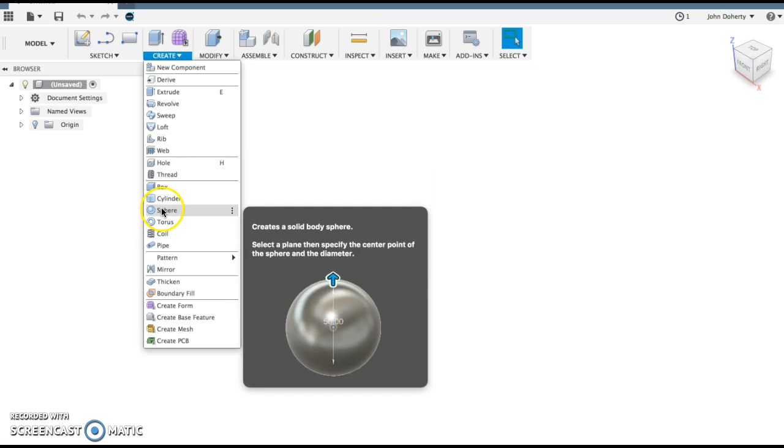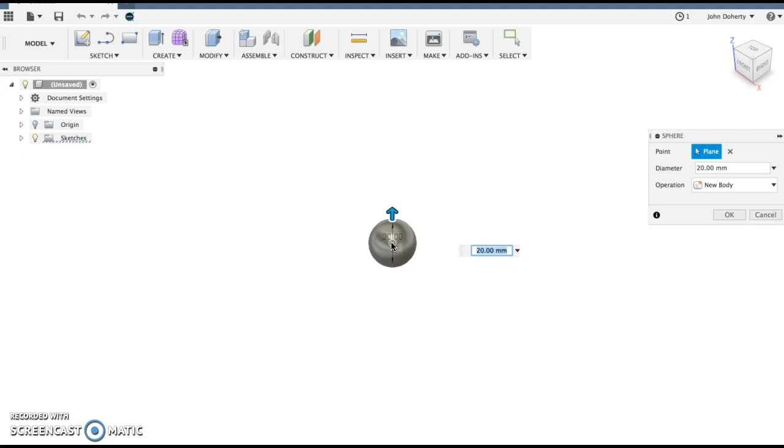The easiest way to design anything like a dome, which is essentially what we're drawing, is to go to Create and select the tool Sphere. We need to select a plane for this, so we're going to go for the base plane or the top plane, then click on the center, and it gives us a sphere straight away. In this case we're going to make that sphere about 15 millimeters, and I'm going to press enter.

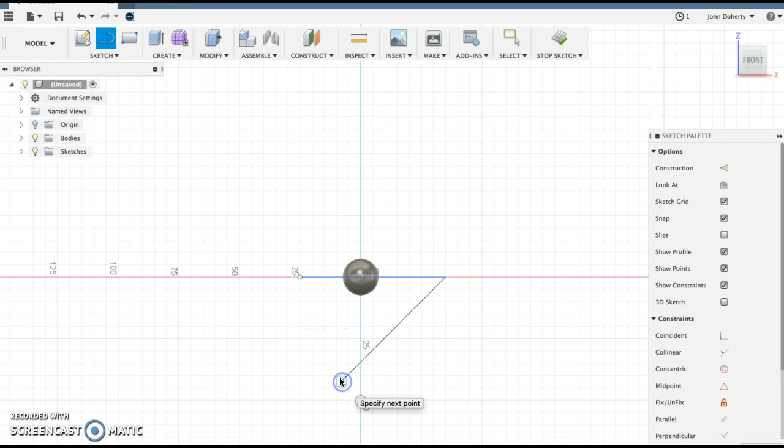Next I'm going to go to the front plane and create a sketch along it. Here I can draw a line across the middle halfway, and draw a simple triangle. The only important line is this center line. The other lines are just so we've created a 2D shape, and you'll see that in more detail if I press the home tool.

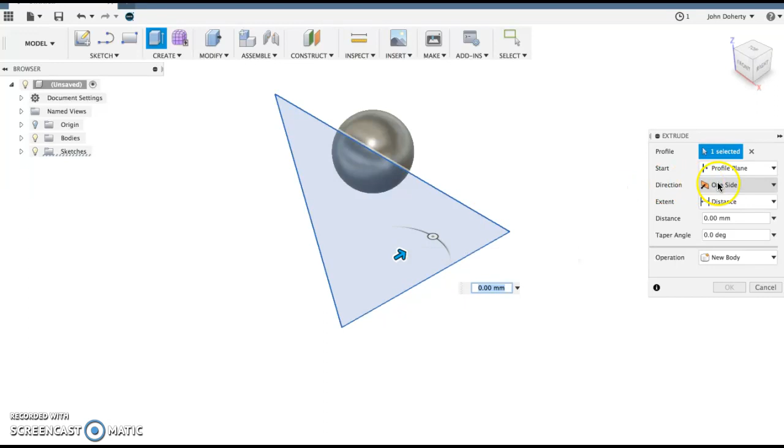I can stop that sketch and press E for extrude. I can go to direction and change this to symmetric. So when I pull my extrude, I'm now in cut mode, cutting through the surface and essentially getting rid of half the material. I've now got a nice little 15 millimeter nose cone once I press OK.

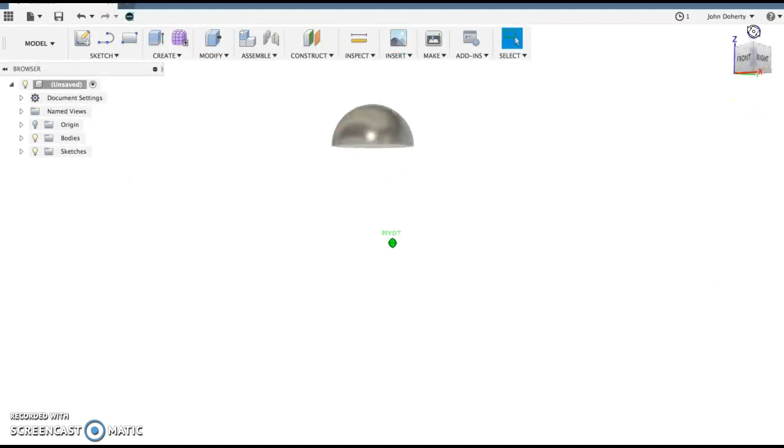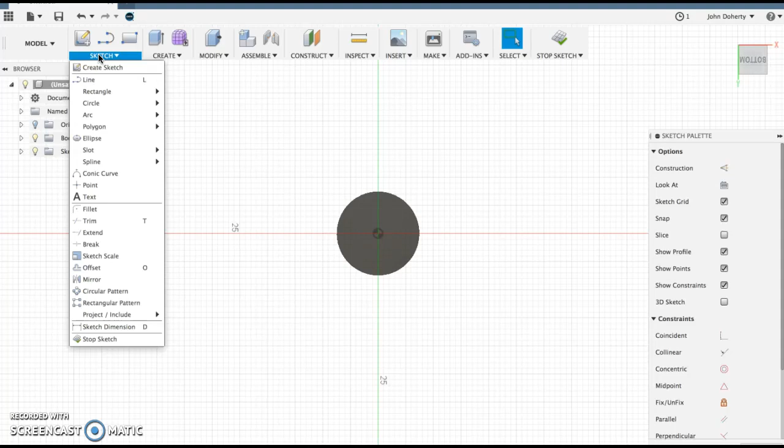Next I can go to the bottom and create another sketch. Here I'm going to create a hole which is the same size as what my dowel will be on my very simple wind turbine model. That's 6 millimeters - actually I think ours was working out at 6.4 millimeters, so I'm going to make it the exact same diameter. I'll go circle, draw the circle, and make it 6.4.

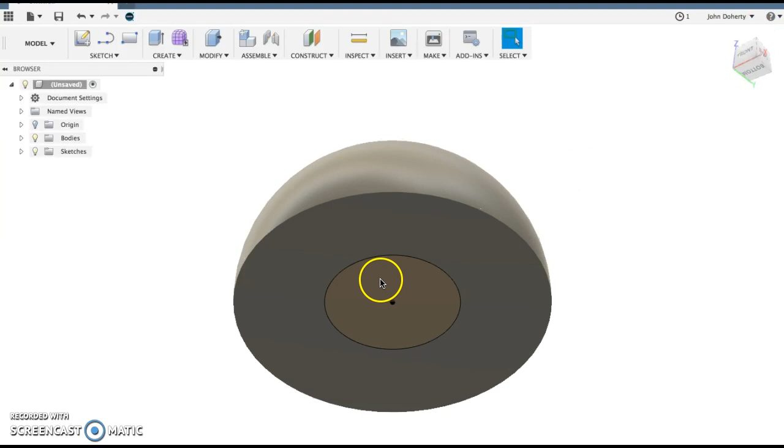Press enter, stop sketch. Then I can press the home tool and drag this up, select this area here, and press extrude. I can also push towards the surface, so I can now cut out a surface for my dowel to go inside. It's going to be 4 millimeters in this case. I press enter and I've got myself a nice little slot.

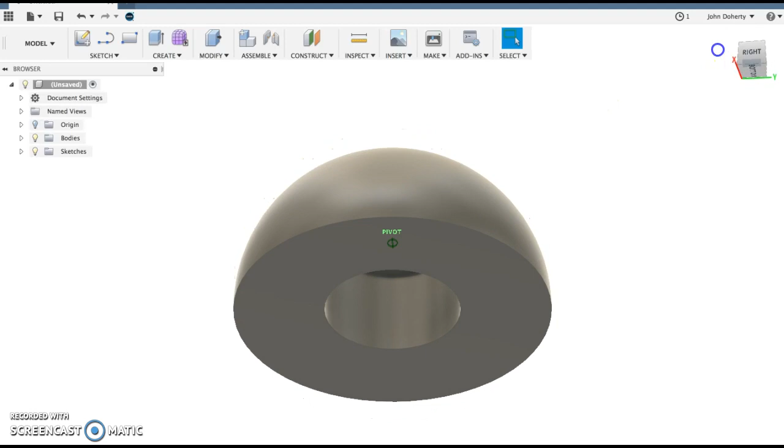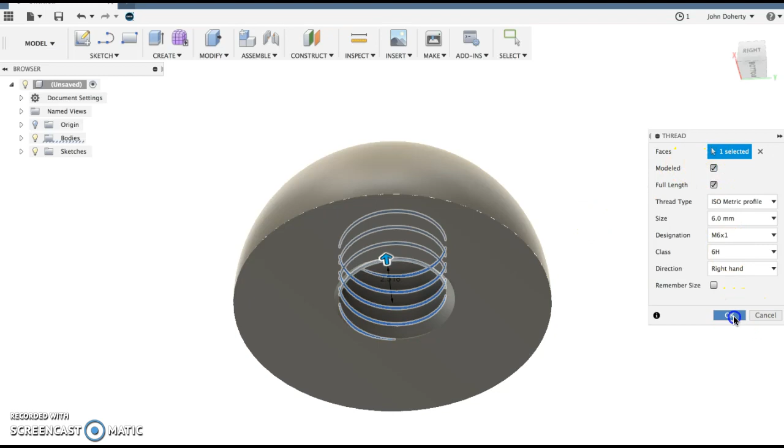I can also select this area inside, go to modify, create, go to thread, and put a little thread on the inside there as well - I can model that too. So now I've got a little thread on the inside, which if I was making a screw or anything to fit in there, would make it a lot easier.

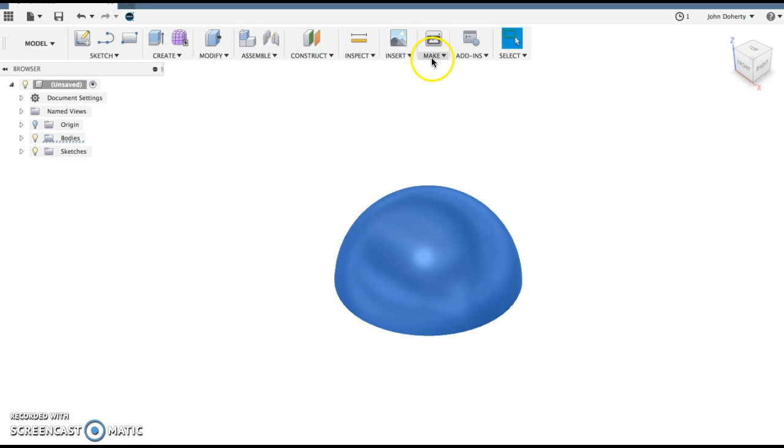Now the next thing is 3D printing. If I want to 3D print this particular feature, or any feature for that matter, I'll just zoom out a little bit. The first thing I do in Fusion 360 is select it, then go to Make 3D Print. It's as simple as that really.

Now if I have a 3D printer connected directly to this laptop, or a wireless 3D printer, I can print directly from this by sending to the 3D printer utility. In our school at the moment we actually have a standalone 3D printer where we save the file on a pen drive or memory stick. So in that case I can unclick the send to 3D Print Utility, but keep the preview mesh on and press OK.

For refinement, I'm going to keep it on medium - I don't need these to be absolutely perfect. So I'll press OK, and that allows me to save the file. I'll save the file as nose cone wind turbine, choose where I select it, and press save.

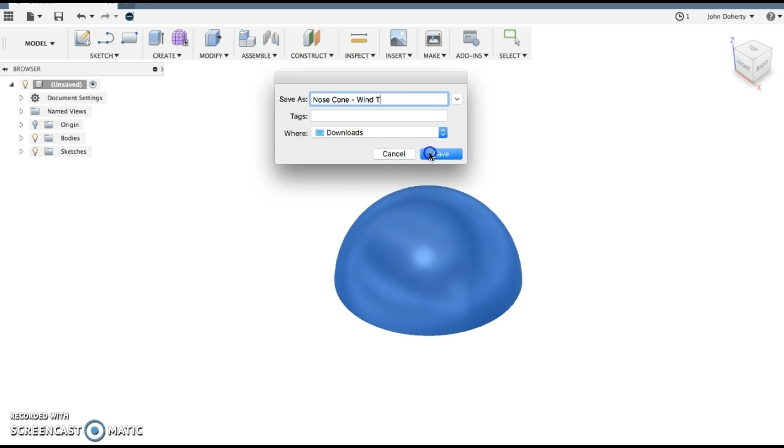The key thing here is this file is going to save as an STL file, and that's the type of file you need for 3D printing. On a desktop it might say save as STL as well, but I'm doing this now off my laptop.